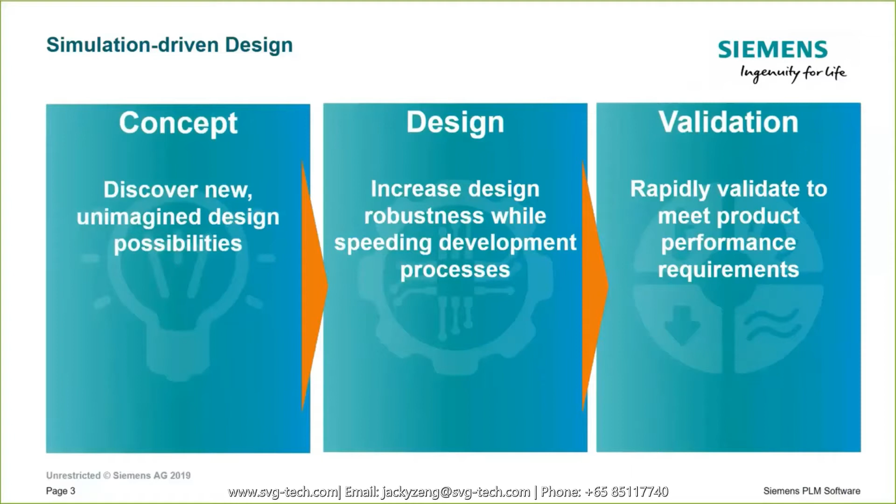At Siemens, we've removed the wall that has traditionally separated design and simulation teams. We've integrated our design and simulation technology through the combination of NX and SimCenter simulation technology. Both NX CAD and SimCenter 3D and Simcenter FloEFD products are based on the NX platform, which means designers and simulation experts can easily share data and technology.

This means simulation can be exposed to the design team directly in the NX CAD environment for both conceptual design and detailed design work. And simulation experts can have confidence in the results created by the design team, since they're using the same fundamental technology, and they can even have control over the types of simulations that can be run by the design team.

Siemens can help you implement simulation-driven design in two ways. The first, which was a focus of one of our previous webinars, is the ability to automate advanced yet routine simulation processes so they can be used by designers and design engineers. It's possible for simulation experts to capture and automate those complex analysis processes so that they become repeatable processes using best practices that have already been defined by your CAE team.

These routines can be packaged and deployed directly in the CAD environment, so your design team can perform these simulations on their own, which then frees up the CAE team to work on more complex tasks.

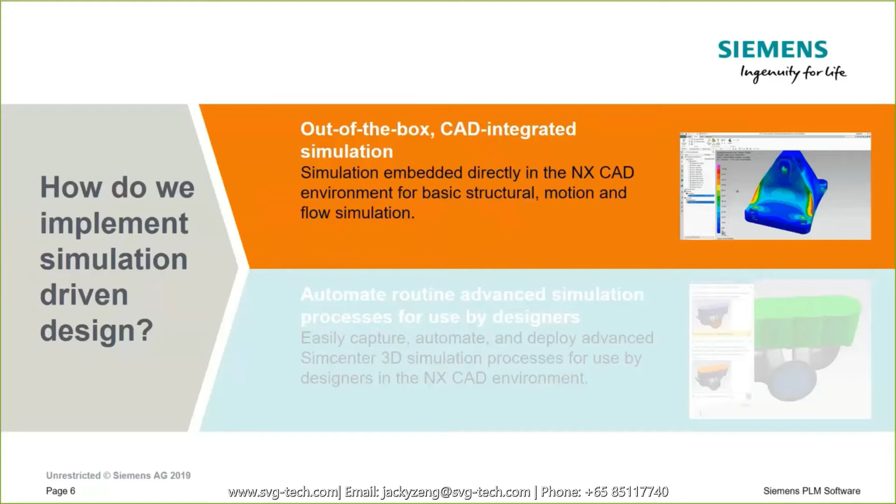Having a design-centric workflow is one of the key differentiators for ambitious, best-in-class companies today. A unified, consolidated tool such as NX streamlines the product design cycle.

So General Motors, for example, is making a push to expose simulation to designers, where they're using NX CAD embedded tools to determine if a particular design is reasonable, if subsequent iterations are improving its performance, or if a change actually degraded performance and should be abandoned.

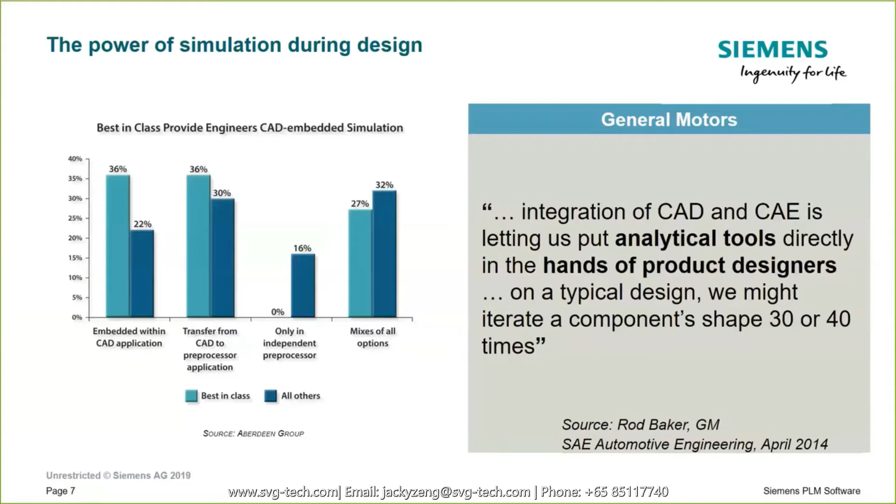So what do we mean by out-of-the-box CAD integration? We offer a set of simulation tools aimed specifically at designers and design engineers, and these tools can be added directly into your existing NX installations so that they appear seamlessly within your design environment. No additional configuration is needed.

These simulation tools are based on the leading SimCenter solvers that have been used by simulation experts for decades. This helps designers in two ways: first, the simulation technology used within the CAD environment is trusted; and next, the simulation data can seamlessly scale to your simulation experts using SimCenter. This facilitates increased collaboration and communication between designers and simulation analysts working toward the same goal of creating the best design that meets performance requirements.

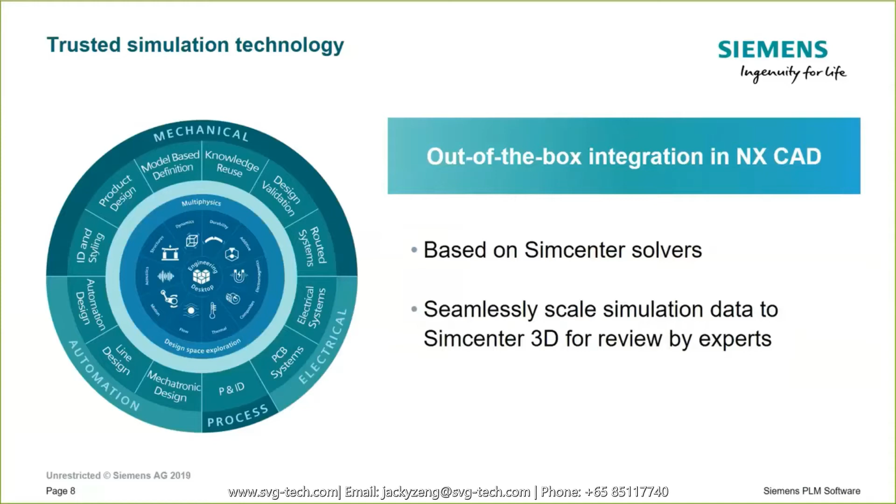Our CAD-embedded simulation tools are aimed at helping you achieve the right designs for structural, motion, flow, and thermal analyses. We also have a tool designers can use to create entirely new shapes optimized for structural performance and weight based on simulation results. This area is called topology optimization, but we're not going to address that today. We'll save that for a future webinar.

Before we get into a live demonstration, I want to give you an idea of how a design engineer could use CAD embedded simulation. Let's consider this example where a design engineer is developing a plastic extrusion die. The plastic will be pushed through this die at high force, and the plastic needs to come out the other side at a specified thickness.

But because of the large force, there is concern that the plastic could, at the exit, cause the exit opening of the die to deform, which would mean the plastic exiting the die would be thicker than what the requirements call for. So the design engineer can use simulation to verify whether the design will meet the requirements and also assess alternative designs.

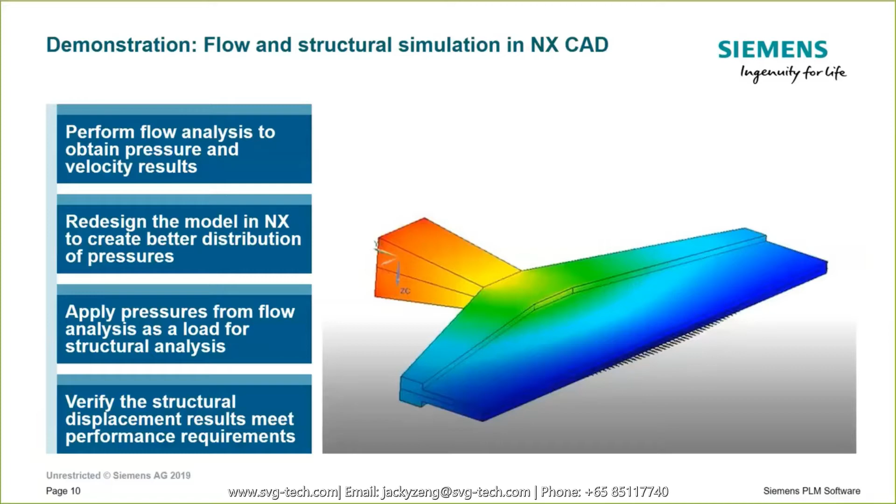Okay, so as Pat mentioned, my name is Tim Miller. I will be showing you an analysis of this plastic film extrusion die. This is the model that we'll be looking at, which you see on the screen here.

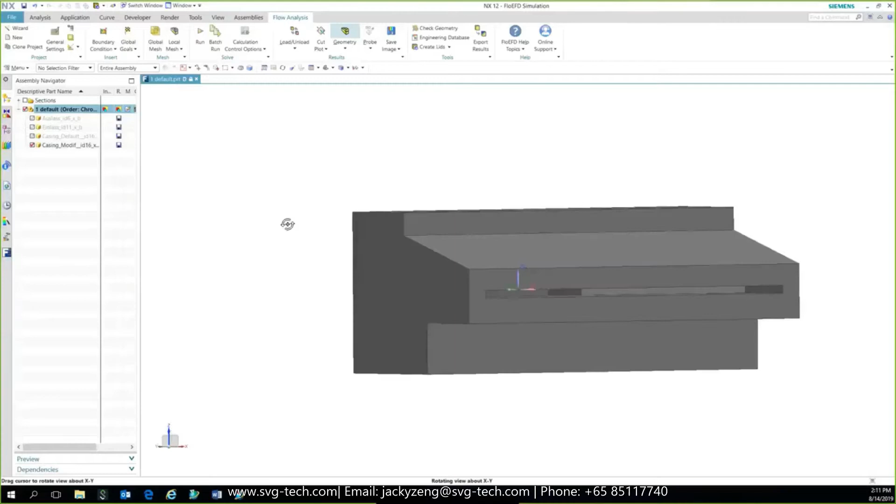The plastic comes in this square hole in the back, and let me put up a clipping plane here to show you what it looks like inside. So it comes down this angled plenum area, and there are actually two different versions of this. The original version that we'll be working with flattens out at that point and continues to spread out left and right until it comes out the front.

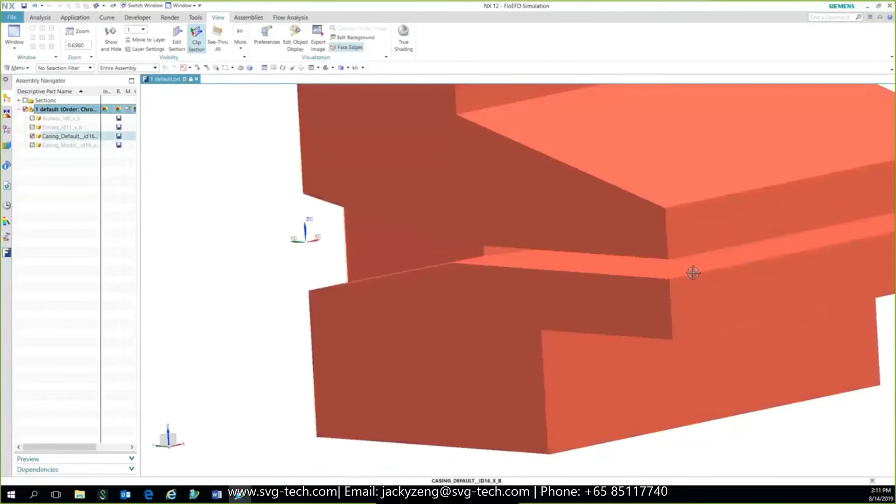The design concerns we have on this die are that we want to minimize the amount of deflection up in the front, and we want to equalize the pressures and velocities of the plastic as much as possible, so that when the plastic comes out of this die, it's a uniform thickness and comes out at the same rate across from the left to the right as we're looking at it here.

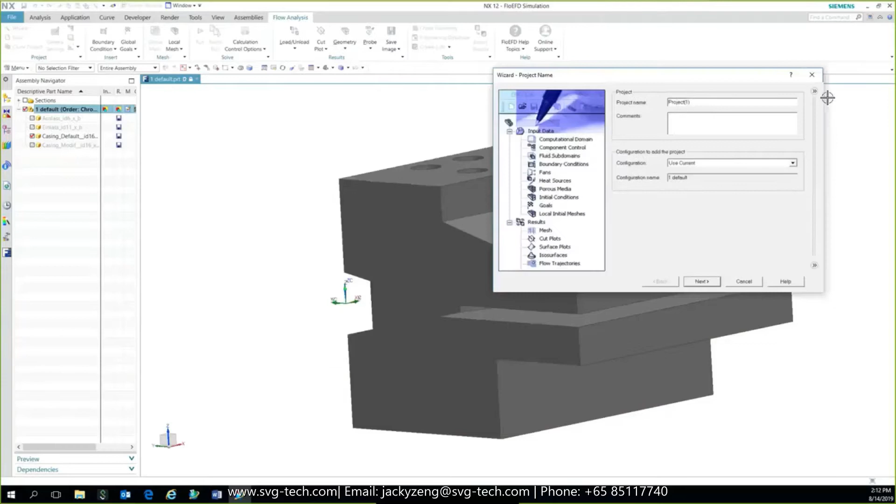So the first thing we're going to do is a flow analysis using the FloEFD simulation capabilities inside of NX. As you can see, there's a tab here for FloEFD called Flow Analysis. The first step is we'll start the wizard that'll walk us through the process of setting up the analysis. Let me move the part over here. The first thing it's going to ask us for is a project name. I will call this webinar.

And we're going to use the default part. I'll come back and show you a little bit later a modified part that we'll look at. When I hit next, it's now going to ask me what units I want to work in.

You can see some SI units are available, millimeters, foot-pounds, and so forth. I'm going to pick the USA units, which are feet per second, PSI, pounds, foot, and degrees F.

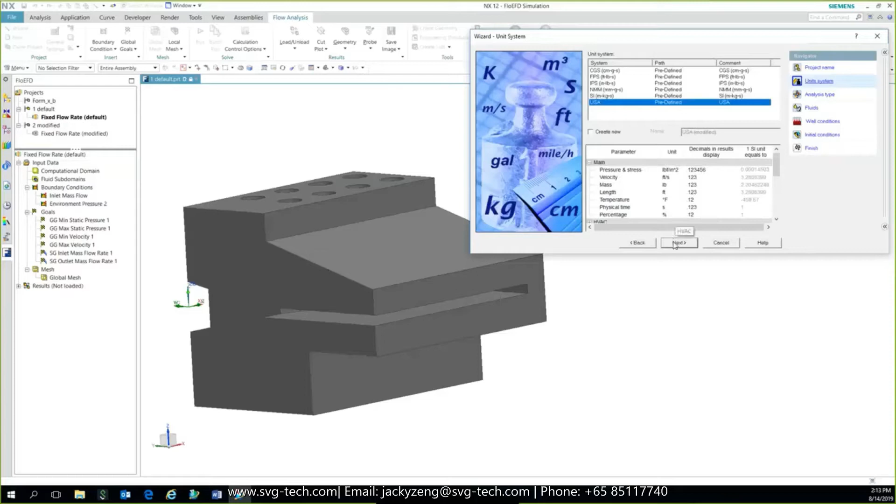Then it's asking me what type of analysis we're going to do. Are we going to do an external flow around the part, which is not the case here, or internal flow, which is selected by default, and that's basically flow inside the part, which is what we want. The flow is inside our die here.

So we'll select that, and then we also need to tell the software what other types of things we want to include in the analysis. We are going to toggle on heat conduction in solids, which will, when I do that, give me a check mark and add an item in my navigator, because if we're going to model heat conduction in the solids, we're going to need to define the properties of the solids, the material properties, and so forth.

Another option here is radiation, time dependency or transient. We won't be using those in this model, but we will turn on gravity. When I do that, it'll show me an arrow indicating the direction currently for gravity, and I can go in and change that. Turns out the negative Z shown there is the correct direction for this model, so I'll just leave it as the default.

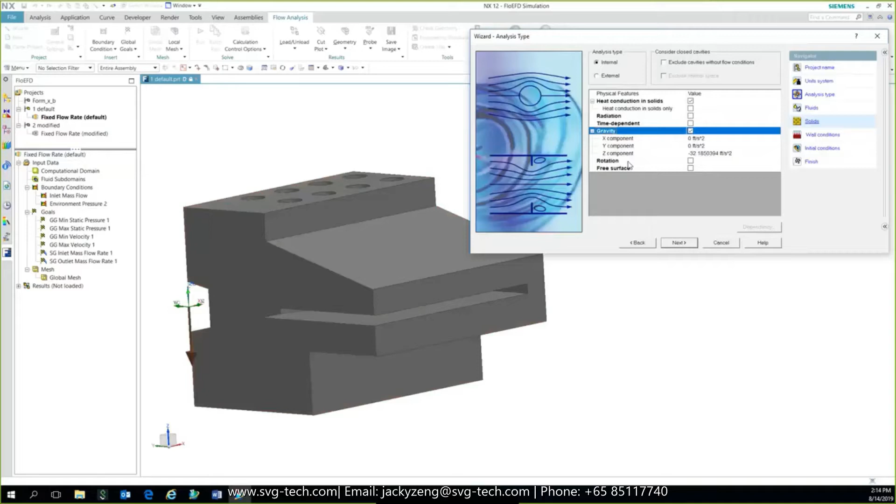And then there's also rotational capability and a free surface capability that we won't be using in this particular model.

The next step is to define the properties for the fluid. You can see we have a number of different types of fluids available in our library listed here. This particular model has a plastic in it, a non-Newtonian liquid. So I will open up or expand the non-Newtonian liquid fluids and select this Dow 501 material as my default fluid material.

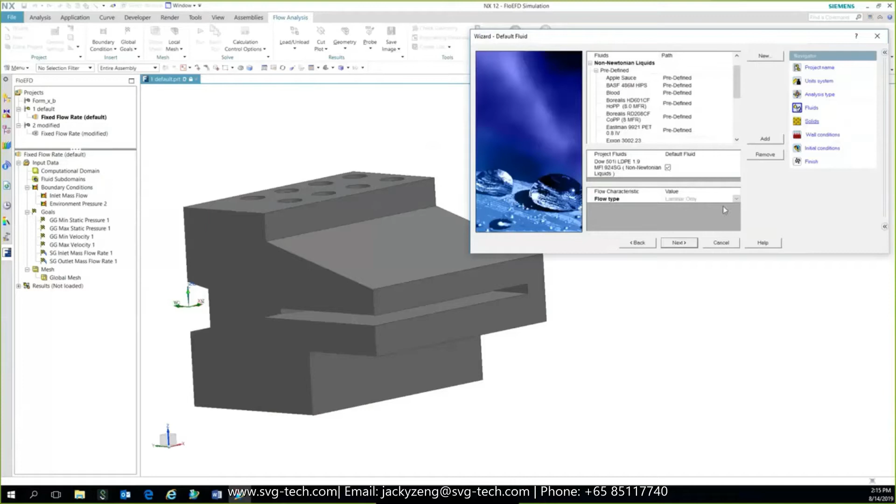Now for the solids, since we're going to be doing conduction in the solids, again, there's a number of standard materials available here, and I could go through different ones. The one I'm going to pick, though, is under the alloy, and it is a stainless steel material.

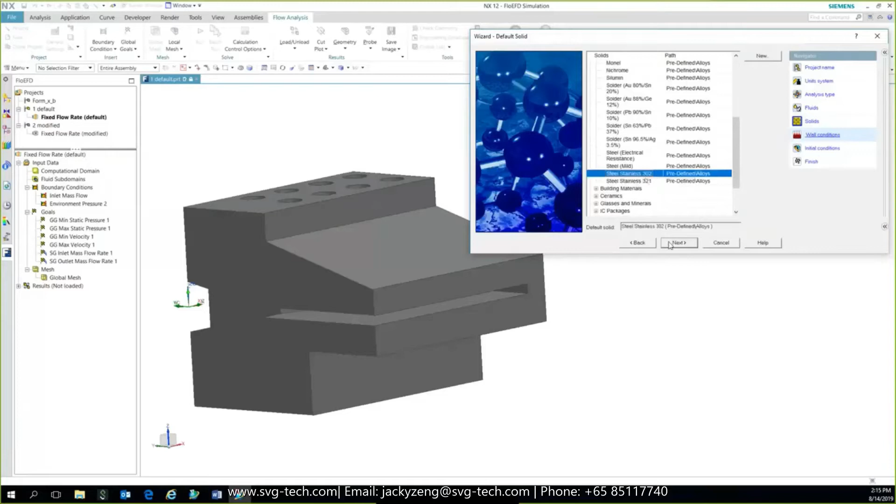Initial conditions, or wall conditions, actually, is next. Wall conditions are specific conditions that I'd want on walls throughout the model. I can also apply these individually by selecting surfaces within the model if they vary. But I could, for example, define adiabatic walls, heat generation rates, wall temperatures, slip conditions, and roughness, and so forth. So I'm not going to change the default there.

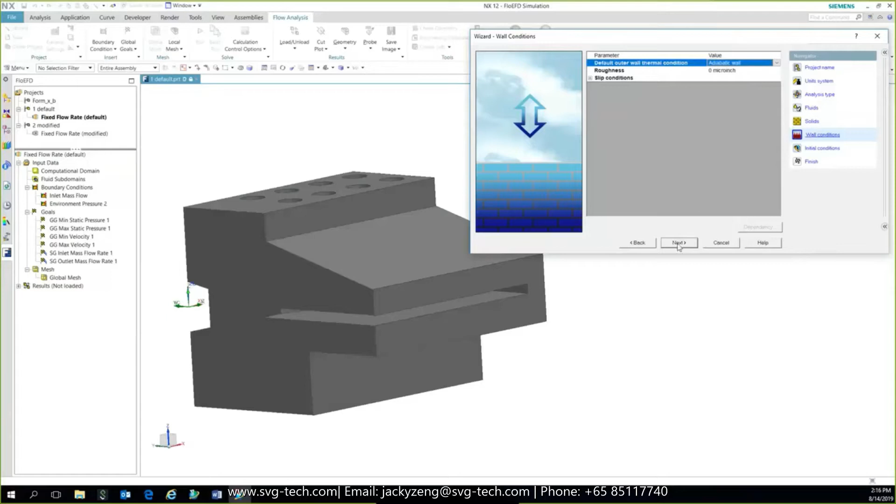The initial conditions is the next item, and you can see there's different thermodynamic parameters I could define: pressure, temperature, and temperature is actually something I want to change. I'm going to start with the melt temperature for the plastic, which happens to be 450 degrees Fahrenheit. And everything else I'll leave as the default.

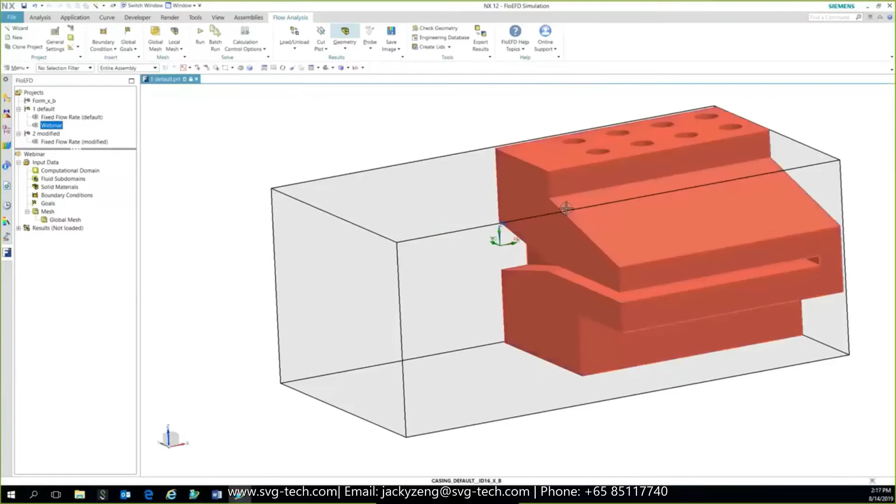So when I hit finish there, it creates this input data for my FloEFD CFD analysis. It also shows me on the screen this envelope that represents the computation fluid domain within the model, which is basically a tight envelope around the model. I'm only showing half the model here, so you can see it fits tightly around that.

I'll go ahead and turn the display of that off. We don't really need to do anything with it at this point.

Now, a couple things that I want to show you as well. Inside of this part, I have created a couple of additional parts. I mentioned that there is an alternate design of the die, which I'll get to in a little bit. But another couple things that we have here are lids or parts that I've created that close off essentially the inlet and the outlet where the plastic goes in and out of the model.

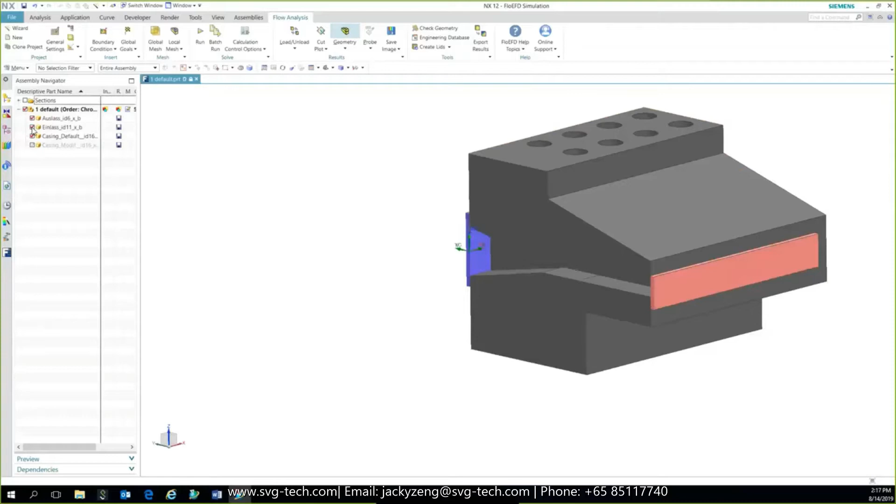So I don't have to go in and define a separate part for my fluid. I just have to close out where it's open with any type of surface part or solid part that covers that face. You can see they're a little bit bigger than the actual face, which is fine. I will also use those parts as boundary condition selections here in just a second.

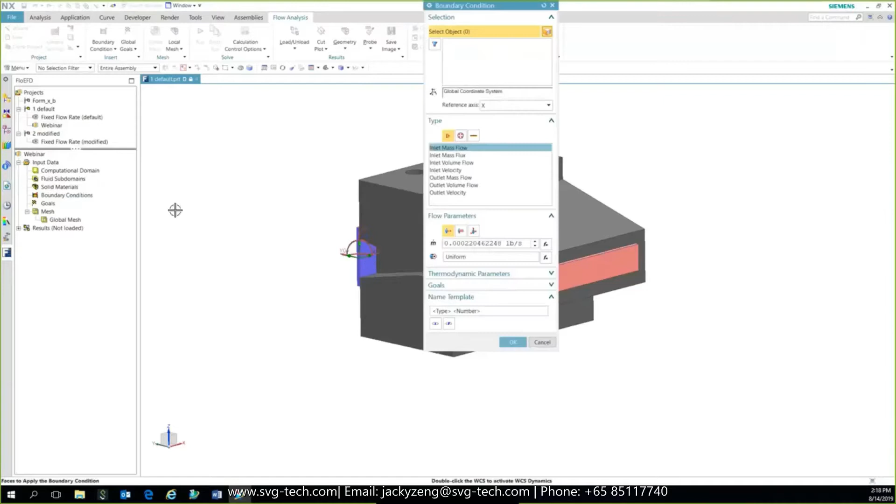So let's go ahead and start setting those up. Let's set up a boundary condition, first of all, at the inlet, which is on this blue surface here. And I can go back to my screen and pick that part right off of the navigator if I want.

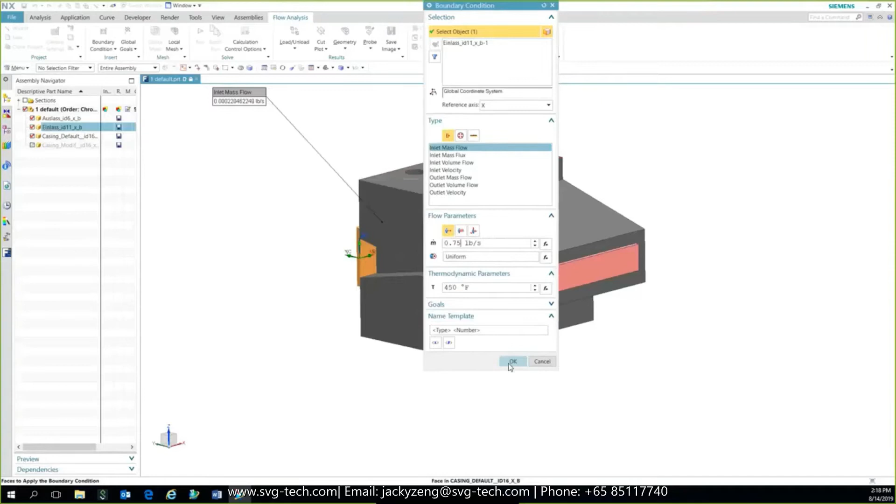This is going to be an inlet mass flow. I'm going to use a little bit higher flow rate than the default here, 0.75 pounds per second. And if we look at the thermodynamic parameters, it's also picked up that initial temperature value as the inlet temperature value, and I'm not going to change that at 450 degrees F. So when I apply that, you can see the red arrows pointing inwards, indicating that I've got an inlet condition.

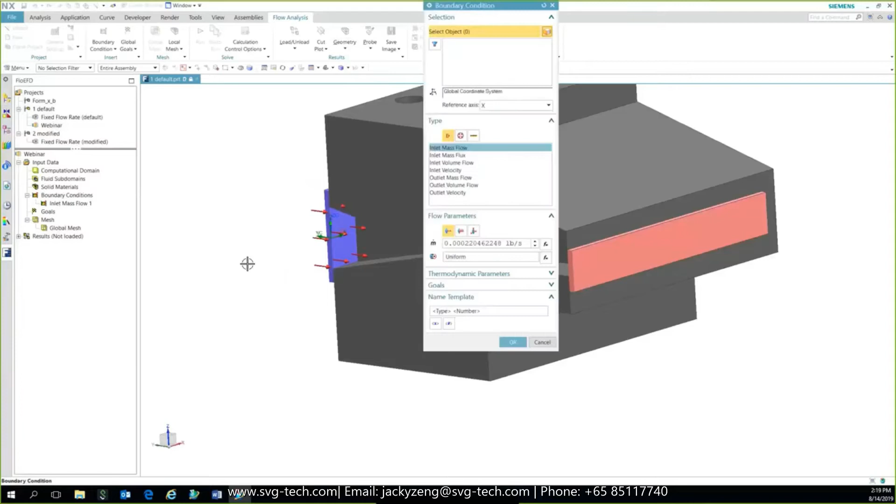On that surface, making the flow go into the model at that point. We create another boundary condition for the outlet or the opening on the model, and this time I will just select the surface here on that lid that I have created. This is going to be rather than a flow opening, this is going to be a pressure opening. So I'm going to define environmental pressure at that location, and I'm going to take the default values, 450 degrees Fahrenheit and standard pressure, and we'll say okay to that.

So that defines the two boundary conditions, just an inlet flow and an opening pressure there. But there are some additional things that we want to define on this model, and those are goals. The goals are used both to tell it what kind of results we're looking for, so when FloEFD solves the model, it gives me those results. But it's also used to determine when the solution is complete, when the solution is converged, making sure that these goals that I define are fully converged and give me results that I want.

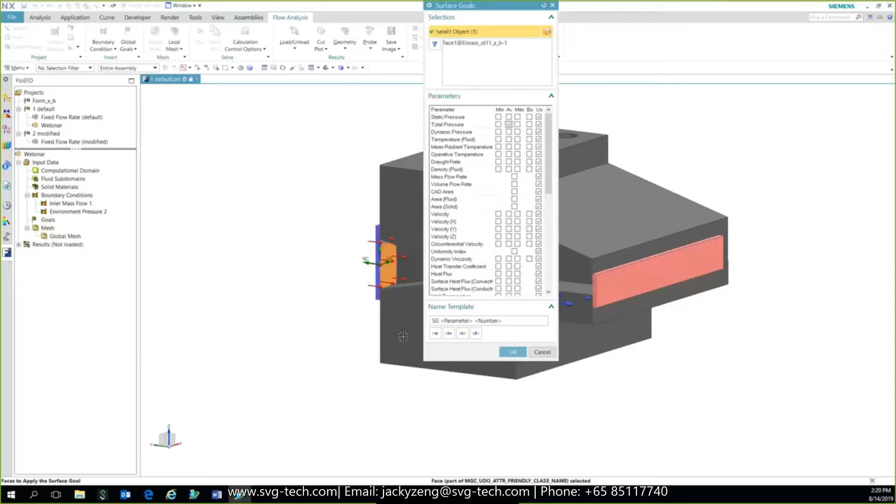So the first result that I want to see is pressures, and I'm going to select total pressure at the inlet as one of my goals on the model. And then I have another surface goal. I'll put this one on the outlet, it's going to be velocity. So we're going to get velocity results, and we want the velocities resolved through the model at the outlet. So that gives me 3 goals there.

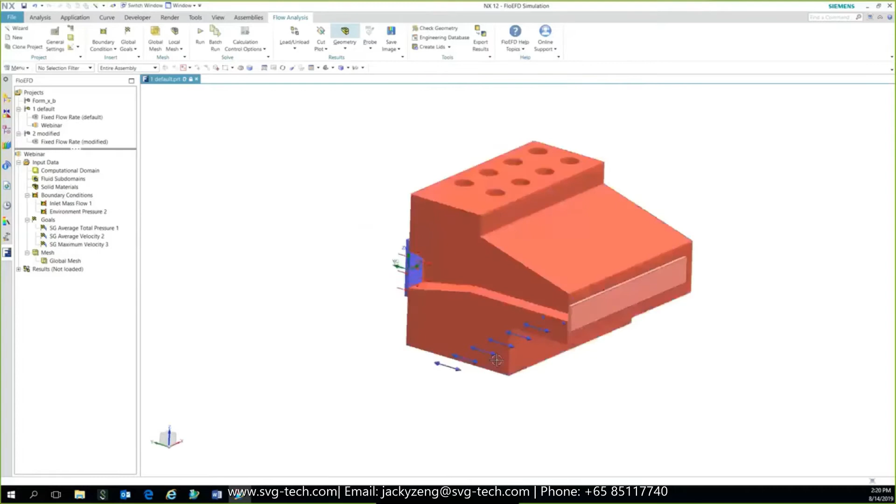And then the last goal that I'm going to set up is kind of a combination goal. I want to know what the pressure drop is through the die. So I'm going to set up what we call an equation goal. We'll call this pressure drop, and it's going to be a function of the inlet total pressure minus the environmental pressure.

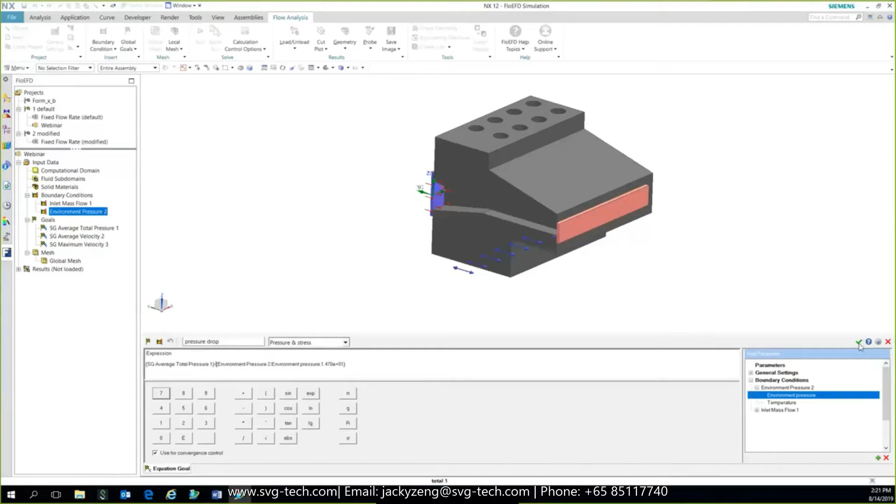Let me double click on that. So we've got, if you look at my equation here, we've got inlet total pressure, and that doesn't look like a minus, so let me repick that. It looks like I picked the wrong thing there. Yeah, it's just the way it looks, I think it is a minus. So inlet total pressure minus the environment pressure. I'll go ahead and click on OK for that, and that'll define the pressure drop throughout the model.

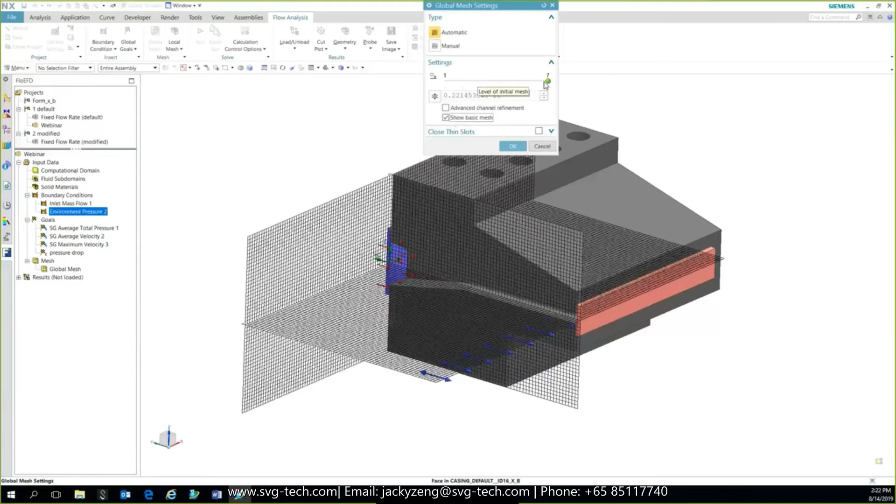Lastly, let's take a look at the mesh. By default, it will give me an automatic mesh that gets generated during the solution, and I can edit that. I can take a preview by turning on the showing of the basic mesh. I can increase the level of the initial mesh or decrease it if I want. I think I'll leave it somewhere here in the middle. The software will automatically go in and refine the mesh to capture fillets and small openings and things like that based on the mesh size I use, as well as I can turn on this minimum gap size, which I'm going to do.

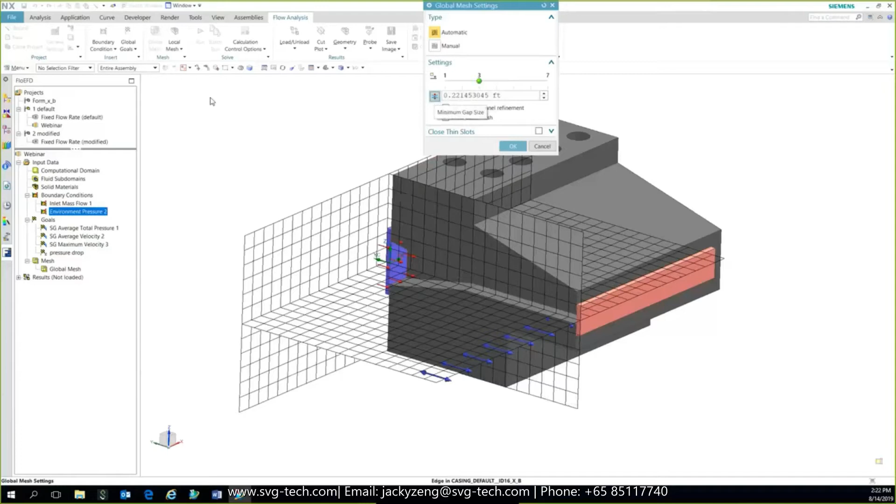For the minimum gap size, you may want to take a look at a small gap in the model, and whatever I put for that, it will make sure it resolves anything that is larger than that gap size that I specify. It will resolve that. So let me go in and do a measure here, and it tells me that's 10 millimeters across that small gap. So I'm going to set, rather than feet, I measured that in millimeters, so I'm going to type in 10 millimeters, and it'll convert that to feet for me, 0.0328 feet. And anything that size will be resolved with the mesh and included as part of the analysis.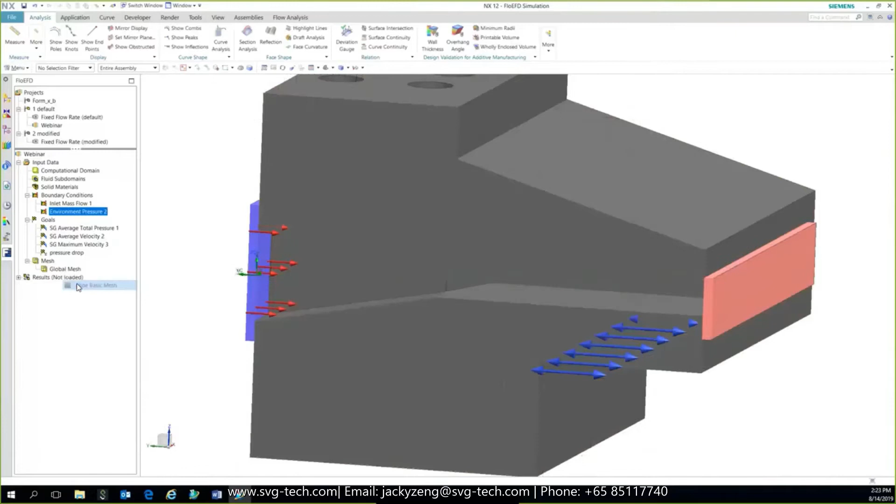So go ahead and hit OK to that, and we can hide the display of the mesh. And that's it, the model's ready to set up and solve. I'll go ahead up here at the top and tell it to run that. This is going to be a new solution, I'm going to solve it on this computer. I could also run it out on a server, and I can tell it how many cores that I want to use. I'm going to use all the cores on my laptop at this point.

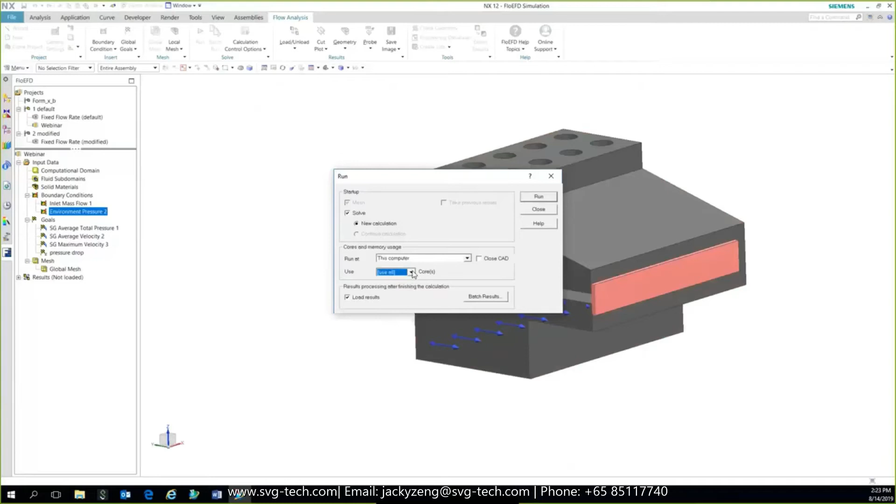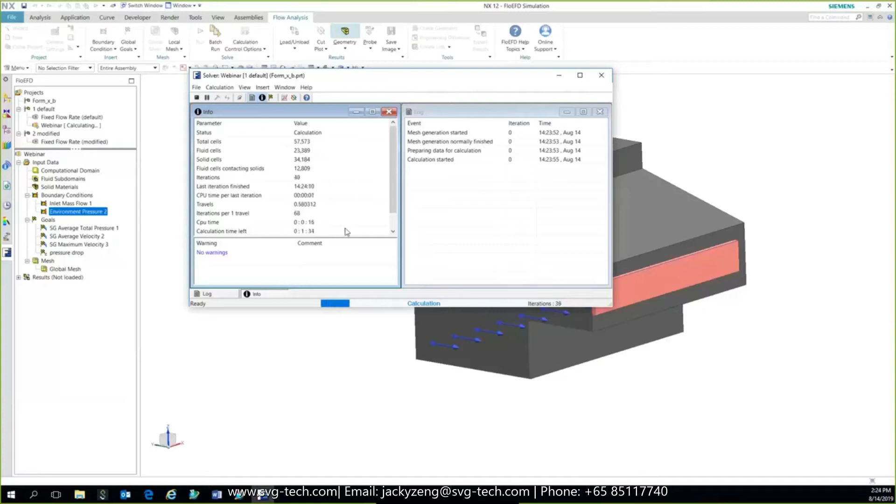I'm not going to wait for it to finish, though it only takes a couple of minutes. What I will do is show you the monitor that comes up, so you can get an idea what it looks like while it's solving. It tells me it's got about 57,500 elements total, about 23,000 of those are fluid and about 34,000 are solid. It gives an estimate of how long it's taking and how much longer, a couple more minutes, and it'll be ready. But while that's solving, I went ahead and solved the model ahead of time, and we can start looking at the results on that model.

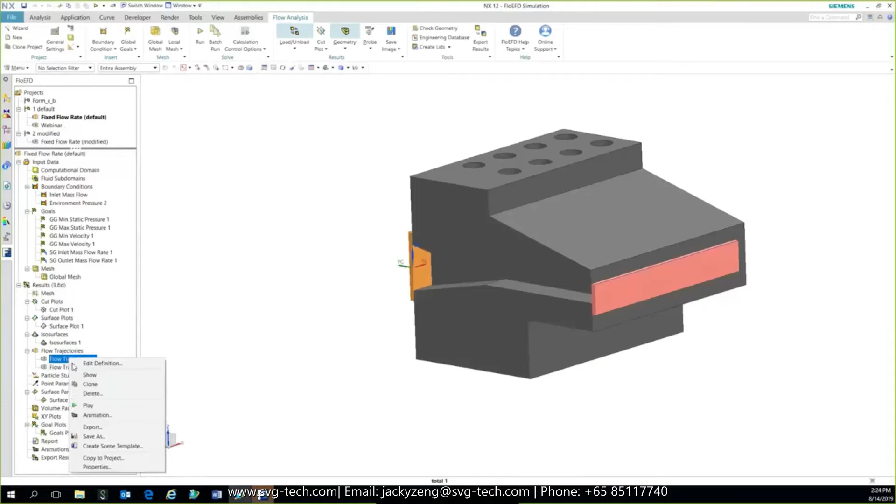The first thing I'm going to look at is some flow trajectories, and I need to load the results in order to see those. So let me do an animation of the flow trajectories and see, based on the velocity results, how it's tracing those trajectories through the model. Maybe a little easier to see if I turn off the geometry and rotate that. So that's one thing we can look at.

Another thing we may want to look at is a cut plot. Let's show that. What that's showing me here is the velocity result, on a cut plane showing the arrows as well as colors indicating the magnitude of the velocity in feet per second. What we see, and maybe a little concerning with this design, is that the higher velocities are more concentrated in the middle here. We'd like to see that spread out a little bit more, and we're probably not going to get that to be perfectly even without a major redesign, but we'd certainly like to try to spread those higher velocities out a little more.

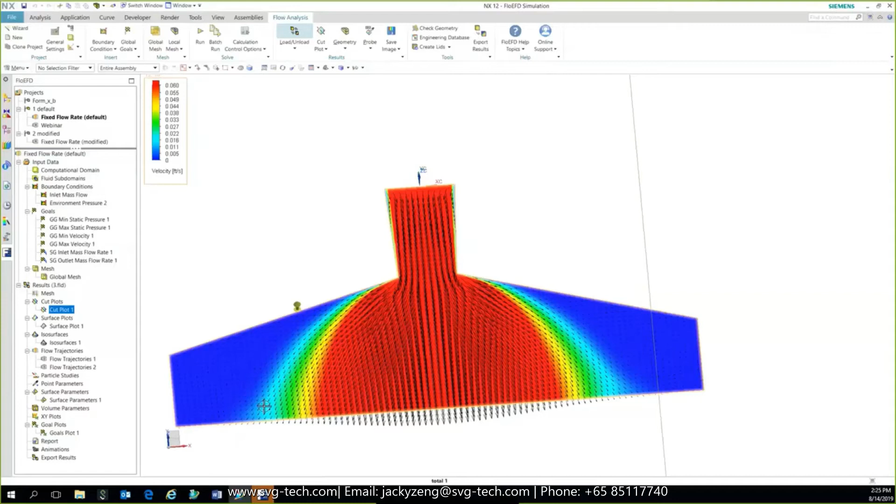If I add on a surface plot of my pressures on top of that, we'll notice we've got pretty high pressures all throughout that angled area at the inlet. They don't really start reducing until it spreads out here, and they're not real even as well. I'd like to see more of an even line across here on my pressures so that I don't negatively impact the deflection of the die when I look at my structural analysis. Because if it deflects, that's going to give me some irregular or non-even thickness in my plastic as it comes out of the die.

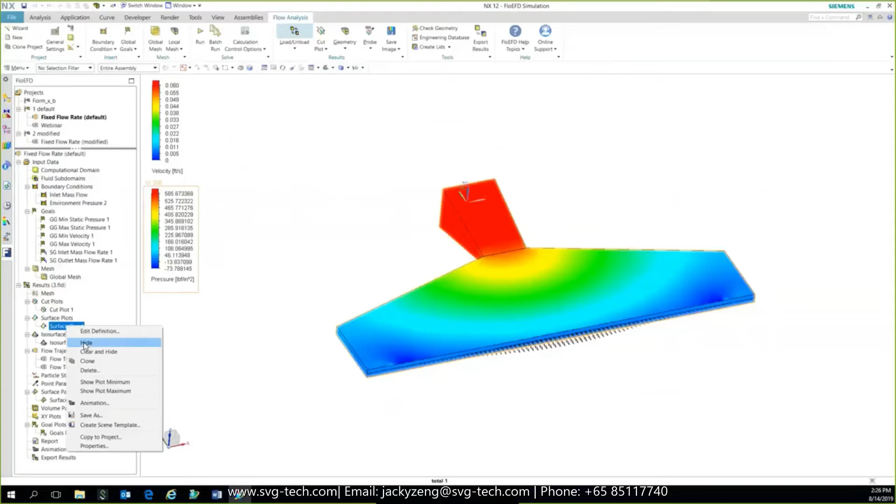So those are a couple of concerns that I have with this model. Let me go ahead and close out. Looks like that thing's solved, we'll go ahead and close that out. But rather than continue with this design, what I'm going to decide to do here is modify it. I showed you earlier a brief view of that redesign, a potential second design.

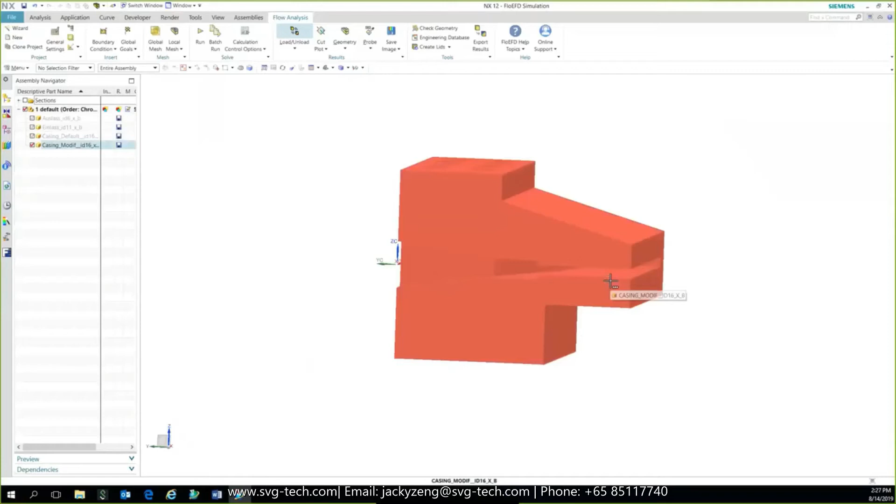Let me hide these results and show you what that second part looks like. So here was my original design - basically, it comes down at an angle and comes straight out. My modified design starts in the same location, comes at an angle, and then opens up a little bit more before it flattens out. The idea here is that hopefully with this opening the pressures will dissipate faster and spread out more, as well as the velocities being a little more even across the outlet.

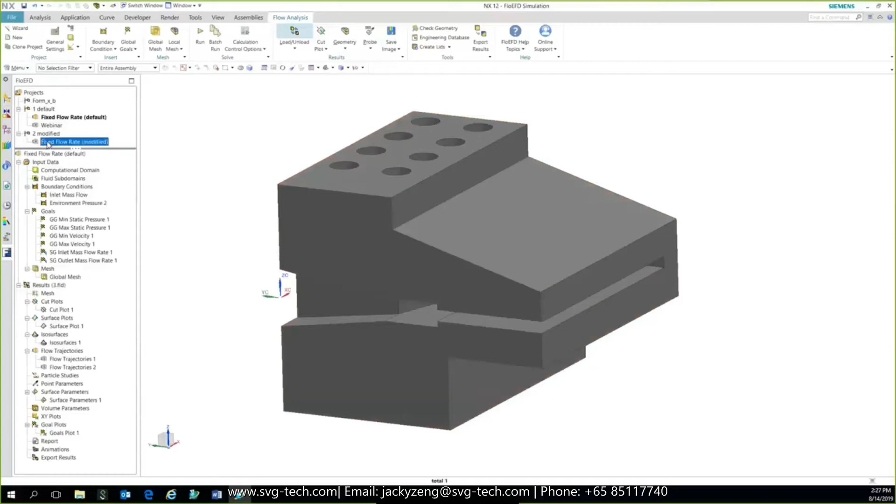Whenever you want to redo an analysis with a new part, since it's fully integrated here inside of NX, it's very simple to just switch the part out, apply those boundary conditions, and resolve it. I went ahead and did that ahead of time in the interest of time, and that's what this modified project is. So let me pull up the results of that.

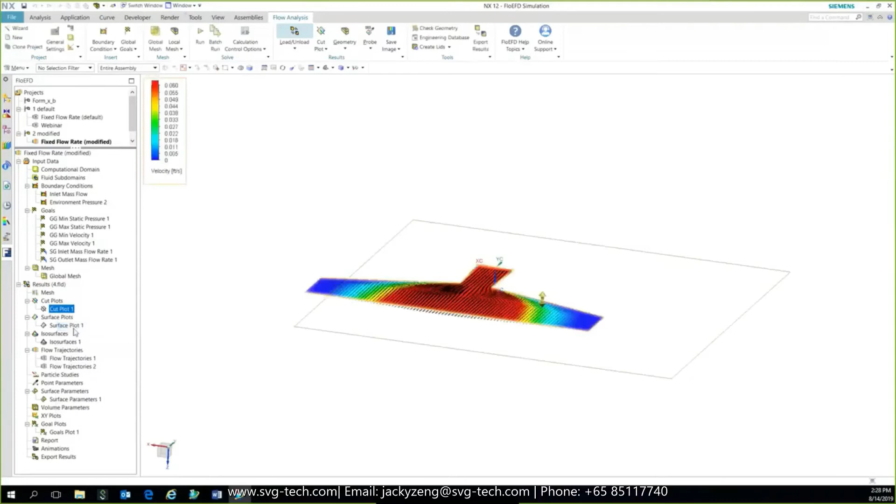As you can see, I've got some of the same results, the same boundary conditions if we were to look at those. Let's turn off the geometry and look at my cut plot, which was my velocities. A little hard to tell, but they are a little more spread out - maybe not quite as much as what I want, but that looks a little better. Looking at my pressures, they definitely look a little different. We've got the light blue pretty well all the way across here, and the red - the pressures are dropping faster at the inlet. These should be the same colors as what I had on the previous plot.

Now, something else I can do here is go in and do a compare. Let me see if I have these loaded here. Yeah, so we can compare one set of results with the other. Let me make this a little bigger so you can see it.

There we go. You can't see the scale, but they do look the same. If you zoom in, the maximum is the same. This is the original on the right, and the redesign on the left. You get a better feel for how the fluid shape opens up a little more and then steps down to the same shape at the outlet. So it looks like this redesign will give us a little more even pressure distribution, which should make the deflections look a little better.

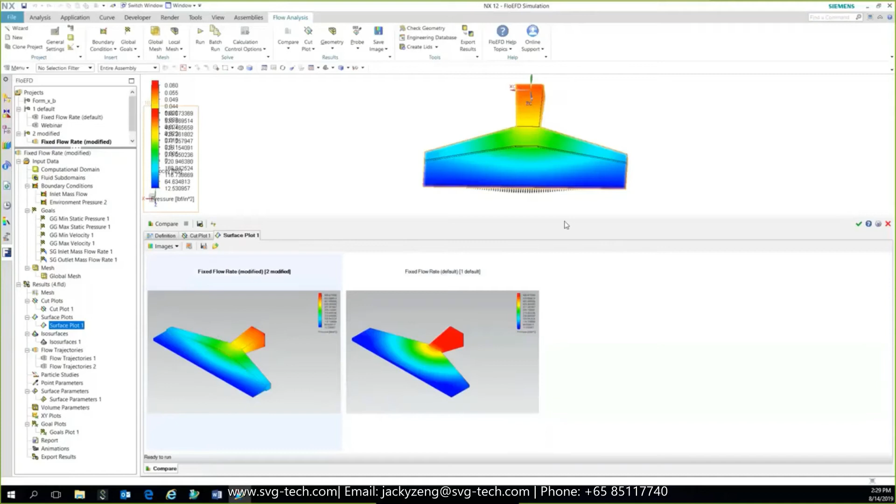That's the next thing I want to look at. Let me get out of this compare view. I want to do a structural analysis on this part.

The way I'm going to do that is export the results from this particular model, the one I have selected, to the product I want, in this case our Nastran structural solver. I can either interpolate onto an existing Nastran mesh, which I haven't set up yet, or export it on the FloEFD mesh node locations. I'll export the pressures, with units in meters and pascals.

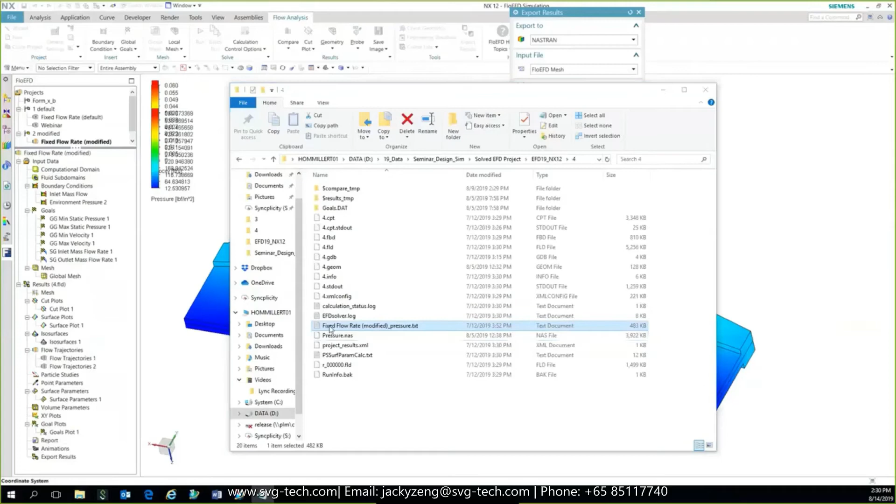On the structural side, when I read that data in, I'll have it interpolated onto the structural mesh I'll define in a bit. The file that gets created, which I already did, is just a format of XYZ location and pressure, in meters and pascals. There are somewhere around 13,000 lines of data from the model I'll be looking at. So export that out, and now let's look at a structural analysis.

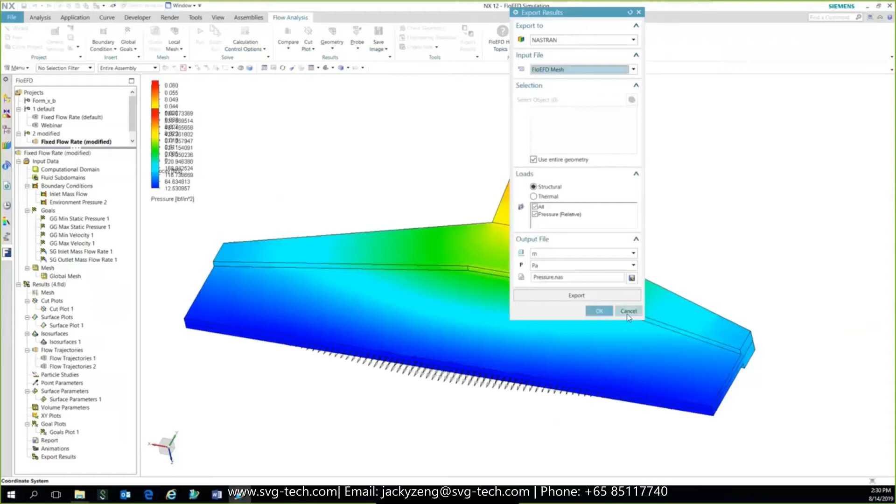For the analysis, we'll set up a finite element model for Nastran. The type of analysis will be structural. You can see there are other options available as well.

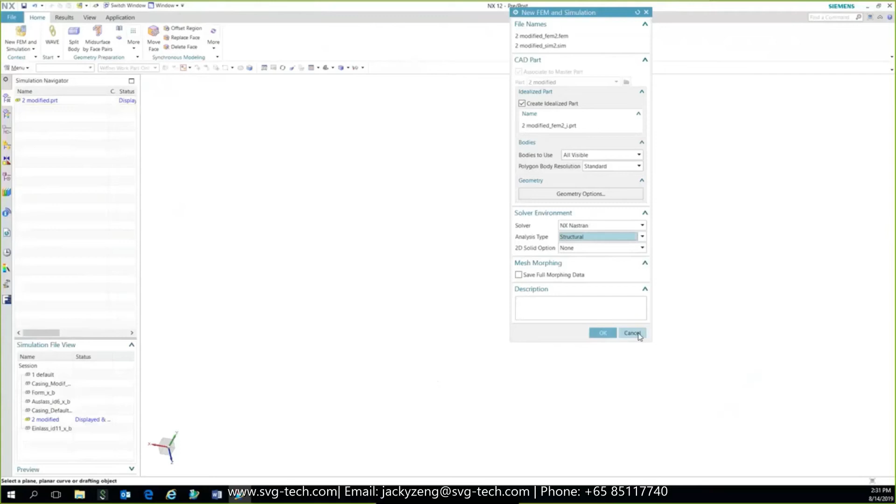The bodies I want to use need to be turned on if I'm going to use visible bodies - I don't have any displayed right now. So let me turn on the modified model. You can see this is the one that has the step in it. You rotate it the way I've been viewing it, which is this view here.

Let me get back into creating my FEM. We're going to only use the visible bodies - there are 3 other bodies available, but we're only analyzing this particular one. I don't need my lids because those were just used to enclose the CFD volume. For the solution name, we'll call this webinar, and I think that's the only change I need to make on my solution.

The first thing I want to do is define the structural mesh. There's a number of options, types of meshes you can create in SimCenter. I'll be using a 3D tetrahedral mesh, which makes the most sense for this geometry. You can also create 2D meshes, a swept mesh giving hexahedral or brick elements, beam elements, and other options. You can even manually create nodes and elements or extrude and revolve elements - a lot of meshing capability I'm not going to get into today.

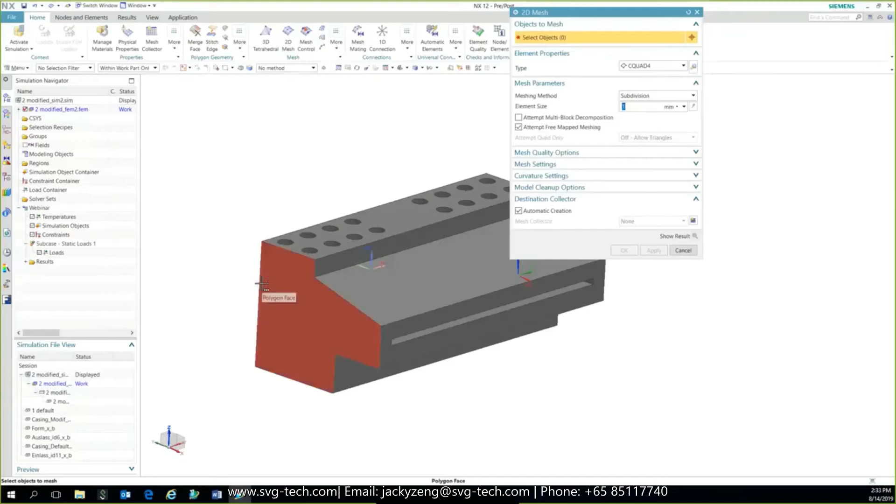Depending on the solver you select, we have the language built in for that solver. So this 2D mesh form is showing only elements available for Nastran. Had I selected another solver, it would show elements specific to that solver. So it shows not only the elements but the boundary conditions that will get created for that particular solver.

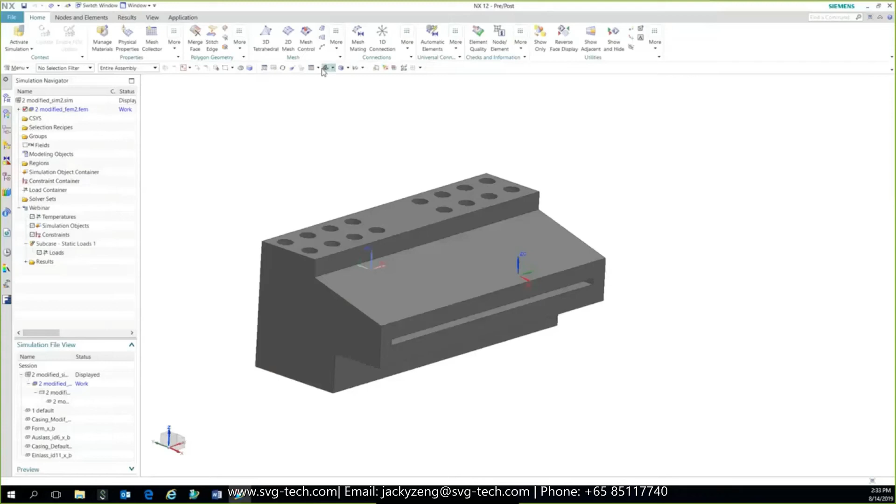So let's go ahead and create the 3D mesh. I'm going to use the TET10 element, the parabolic tetrahedron, with a mesh size of 15 millimeters. I'll leave the quality check, curvature variations, and other settings at their defaults.

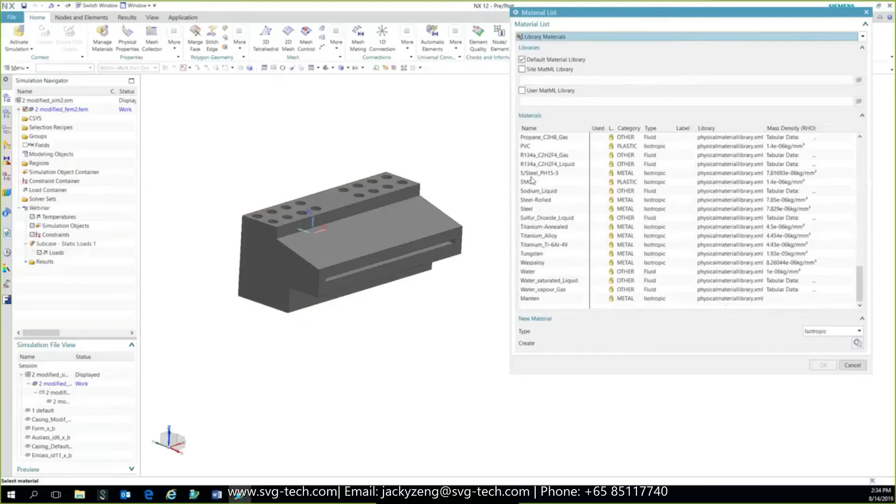One thing I do need to change is the collector, which tells the software what material to use. So I'll set up a new physical property table and pick a stainless steel material out of our library. In the Nastran library, there is a stainless steel right there - we'll use that, and we can call it steel.

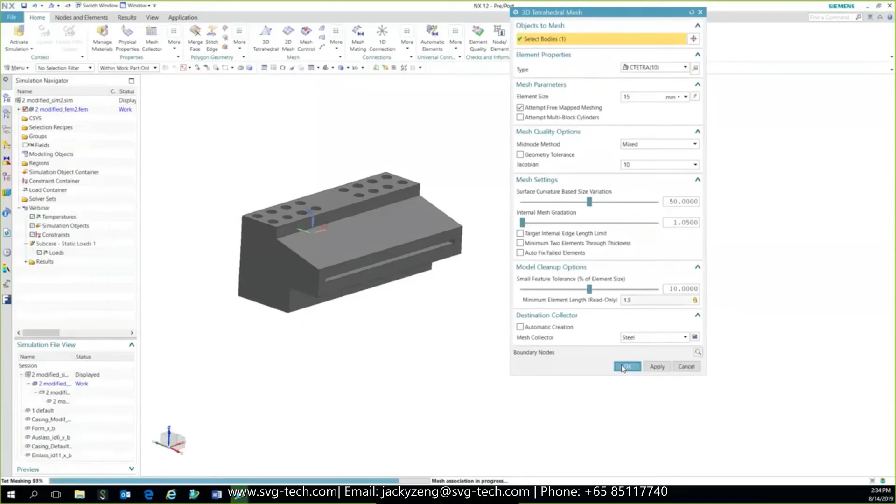And we'll go ahead and generate the mesh. For Nastran, you generate the mesh before the solution on the part, so we'll actually get to see this mesh. And it looks pretty good. It automatically refines the mesh around curvature. You can see a little finer mesh around these holes here.

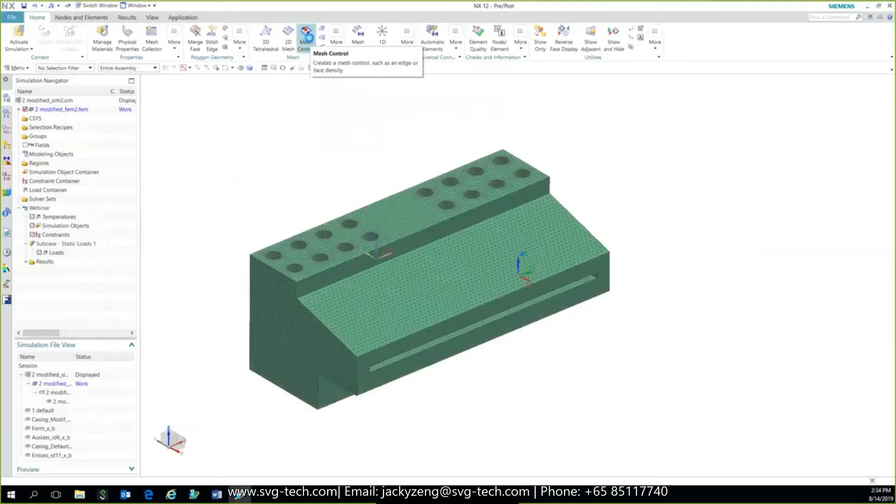The only thing I defined was that I'm going to try to create elements that on edge measure 15 millimeters. If I wanted more control, there are a number of mesh controls I can put in here. I can specify a specific size on an edge, do biasing, specify size on a face, even set up boundary layers, so layers of elements next to a wall. We can also define a bounding volume where you pick a volume inside the part and refine or coarsen the mesh in that area. But for this model, I just used the global size of 15, and that's all I define.

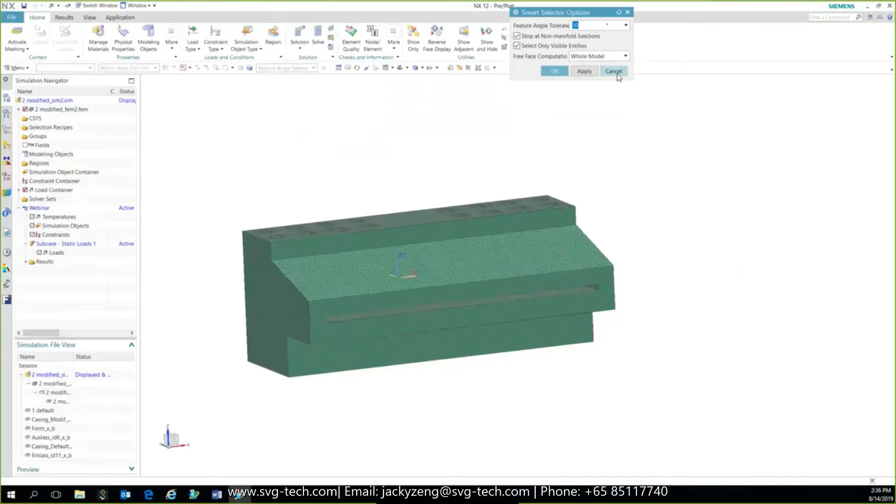And then I've got 2 boundary conditions to set up. The one we've been talking about is the pressure load that came from the FloEFD model, so let's do that one first. It's going to be applied on element faces inside where the plastic is pushing, inside this die. The easy way to pick those element faces is setting my selection tool to feature angle elements. What that does is if I pick an element face, it grabs any other elements within a 30-degree tolerance of being tangent to that face. So if I go in and pick one of these, it essentially gets that entire surface.

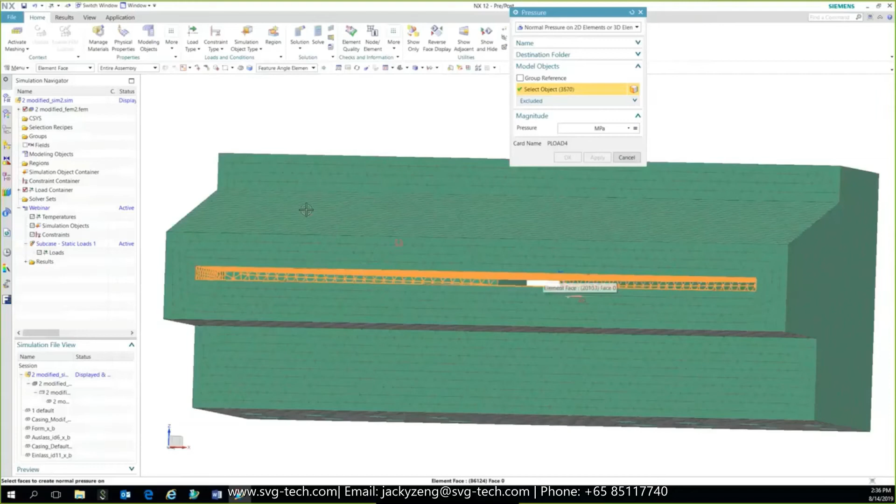Let me go ahead and select some more of these to get the rest of it. You can apply boundary conditions to geometry, which you'll see me do in a minute when I apply the constraint. The reason I'm not doing it in this case is I need these node and element locations to map those values from the FloEFD model onto this model. So we can get the rest of these faces. There's one there for that lip and that one, and that should have all of them covered.

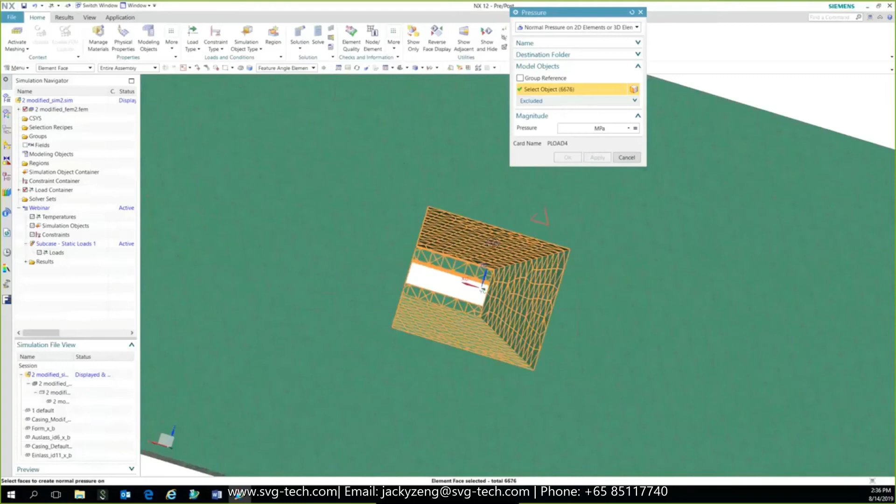Now for the pressure value, I'm not going to put a constant pressure in. We want the pressure to come from that result file from FloEFD. So I'm going to set up a table field, and it's going to be a function of the Cartesian coordinate X, Y, and Z and pressure, except that if you remember when I was setting that up, the units were meters for the X, Y, and Z coordinate, and the pressure was in pascals. So let me set those units up, and then I'm going to go and pick that.

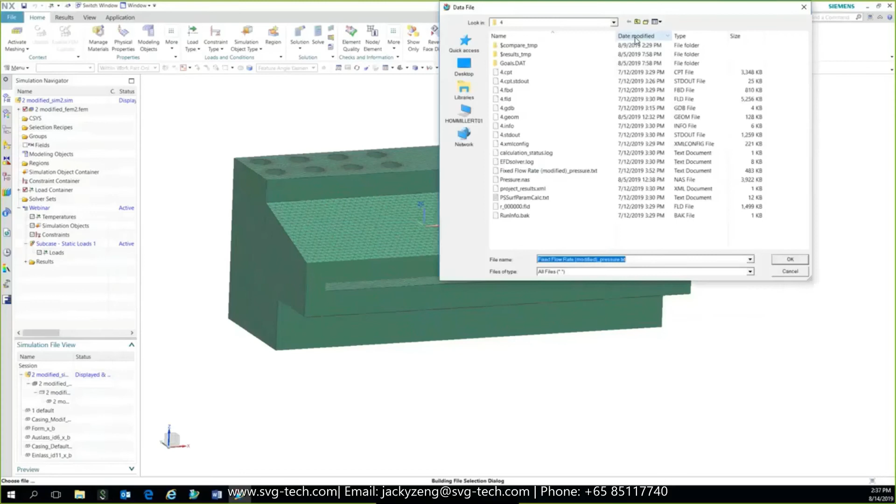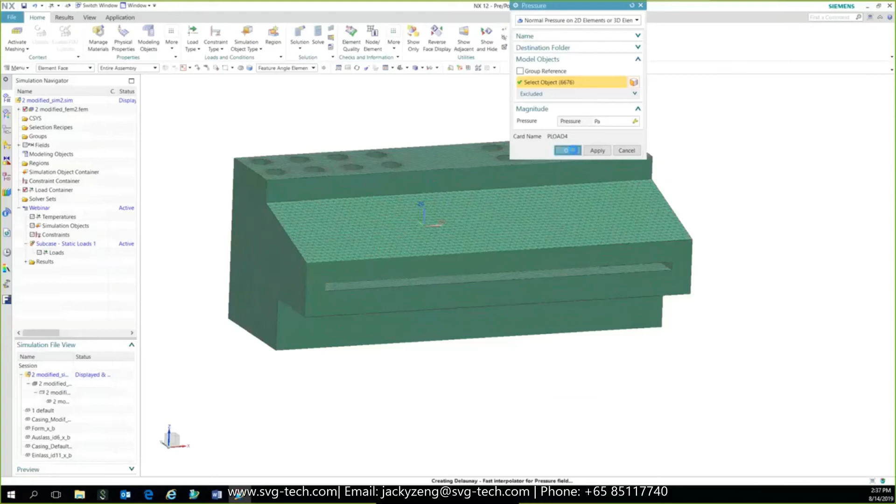The result file that I exported is right there, and it'll bring that in. As I mentioned before, I think there's like 13,000 lines in this, so it's brought in all those values. When I hit OK, it'll map those onto the node and element locations of my structural mesh. If I want to verify those, I can do a contour plot of that boundary condition to view and see that, yeah, this does look like what I had on my FloEFD results.

The other boundary condition that I want is the constraint. I'll turn off the elements for that and set up a fixed constraint, and it's going to be on the holes on the top and bottom here. I should be able to just do a window around those holes to select them. Total of 64 faces - there's 16 holes on the top and the bottom, so that's 32, plus the bottom face is 64, and that looks good.

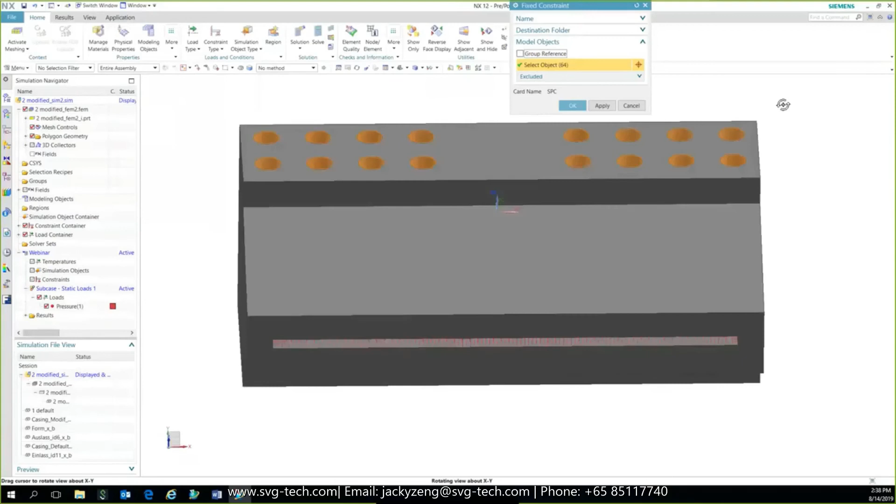So that's the fixed constraint. There it is. And the model should be ready to solve. Let's go ahead and solve this one.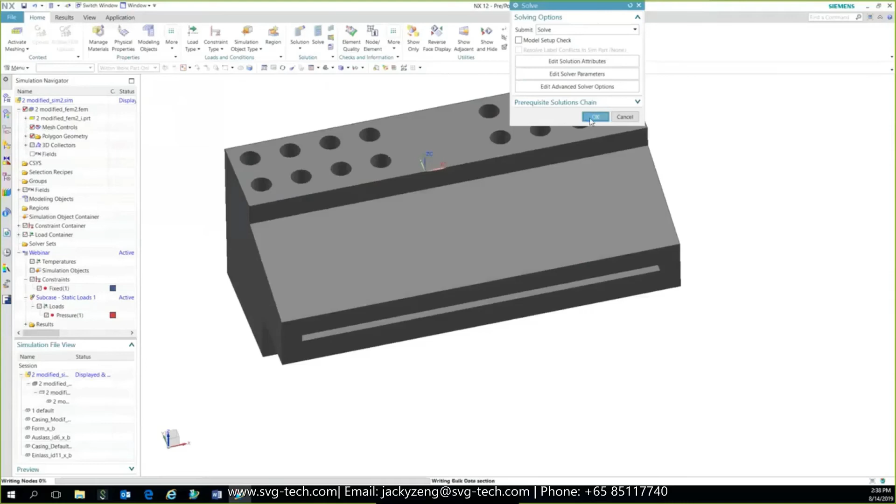It takes less than a minute, so I'll go ahead and let it run while we wait here and show you what happens during the structural analysis solution as well. First it goes through and writes the model out. Let me move this solution monitor over. Looks like it created about 250,000 tetrahedron elements, 261,000, and the nodes created were about 388,000 nodes there. We've got the pressure load on 66,000 faces, and about 23,000 nodes being fixed there.

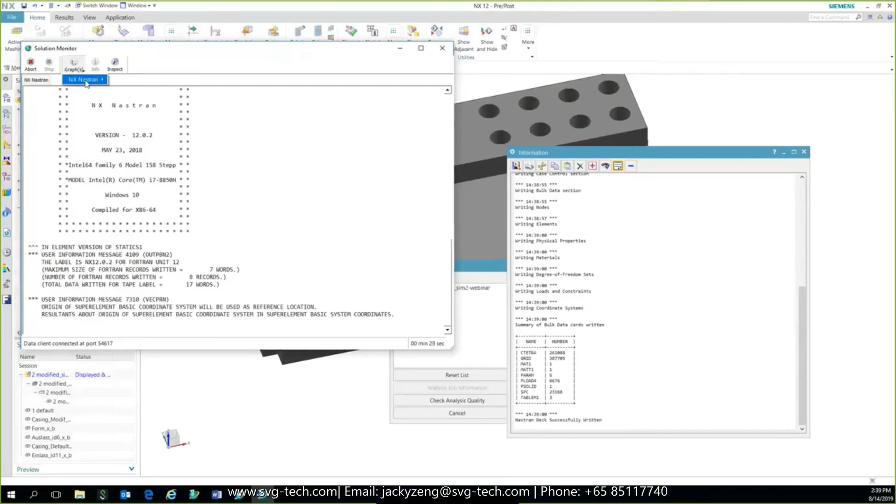So as it's solving, we can look at a graph of the convergence, and you can see it's converging pretty quickly here. Within just about 30 or 40 seconds, it's converged, and we have our structural results. So let's close these windows out. Normally with structural analysis, we might be more interested in stresses, but on this particular model, I know I'm not going to be anywhere close to yield stress on this material. So I'm more interested in looking at displacements. Let's take a look at those.

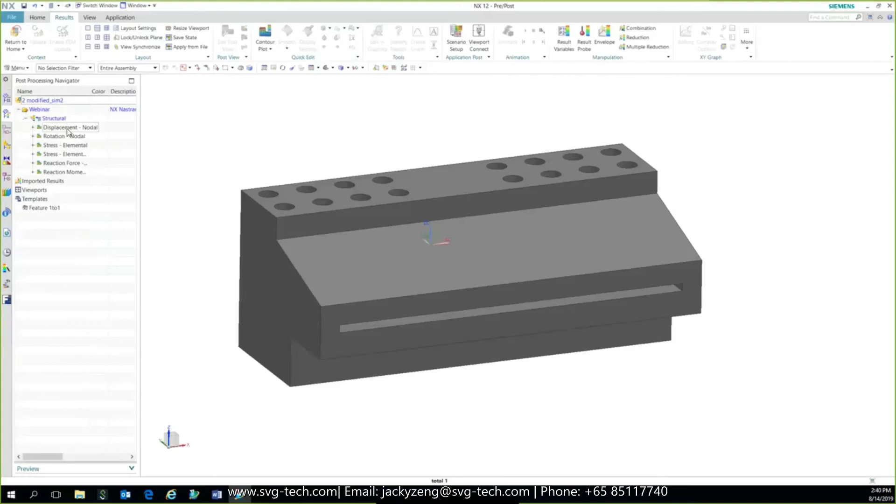So let me turn off the exaggeration that comes on by default and show the nodal displacement. These are the displacements, and they kind of match the pressures. If you think about it, it makes sense that there's a bit more displacement on the bottom than the top, because there's less material on the bottom stiffening it. There's a little more material on top, so it's slightly less. Overall, my goal was to keep this under 0.1 millimeter deflection, and we've done that, so it looks like this new redesign is going to work.

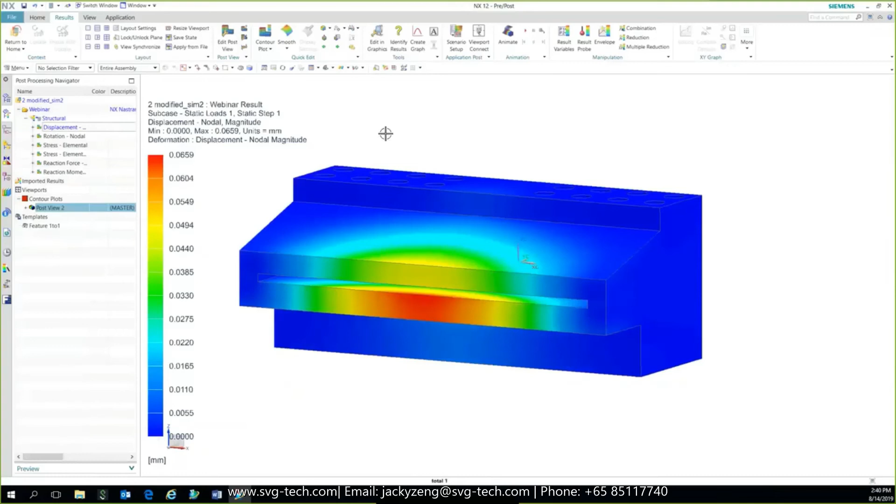We can also look at cutting planes through this model, although they're fairly constant. As you move the plane around, you can dynamically update it as you slice through and verify the different areas of what the displacements may be.

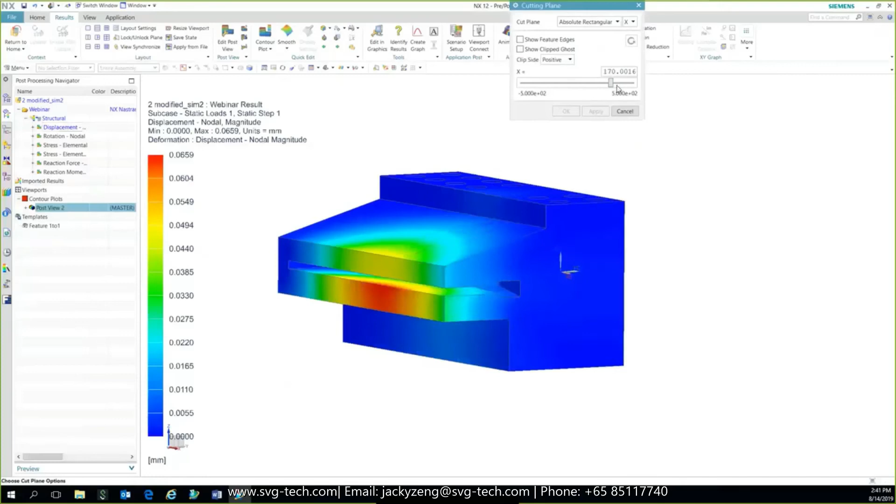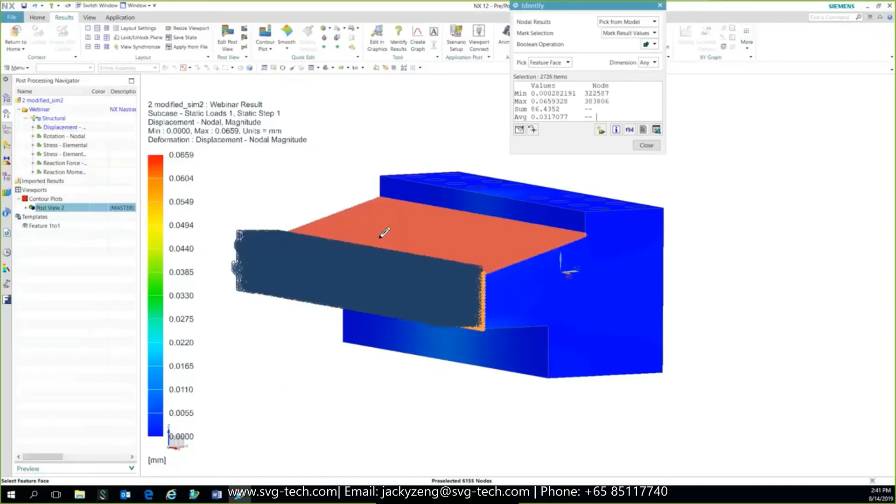Something else you'd probably want to do with this model is find out what all the displacements are on a given face. So we set the picker to be a face, pick a face, and it will list all the different values. There's a lot of them with the mesh size I have, but the good thing is it tells me the min and max, which we knew was 0.0659.

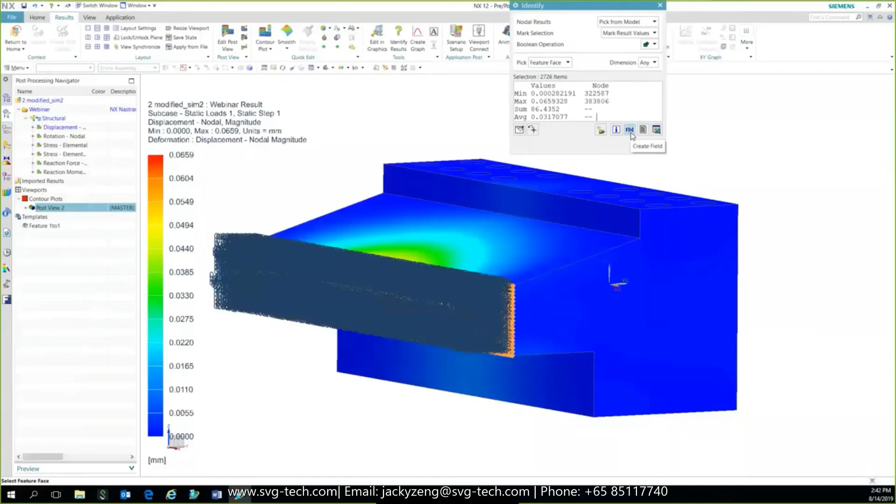The average is 0.031. We can also export this into Excel if I wanted to view it there for whatever reason, or export it to a text file. I can save that selection as a group as well, or create a field from it to use in some other area of analysis.

So I think that's pretty much it. I'll turn it back over to Pat at this point to summarize what we've talked about today.

Pat? Yeah, thanks, Tim. Good job. Let me get my screen back here. All right, thanks again, Tim, for that—that was a really great demonstration.

As you just saw in Tim's demo, both the flow and structural simulations were embedded within the CAD environment, making it easier for a design engineer to learn and navigate the workflow. This also allows the flow and structural models to be associated to the base NX CAD model, so any design changes can rapidly be reevaluated with minimal rework. Finally, you can easily chain analyses together so results from one analysis can be applied as input to another, such as the pressures from the CFD result being applied to the structural model of the die to check the deformations of the exit opening.

Just to go over a couple of customer examples here—let me get my slide change, there it goes. Guangxi Yuchai Machinery, the largest producer of internal combustion engines in China, uses simulation-driven design to help meet market demands for more personalized products.

Greater personalization means more product categories, but with limited dedicated CAE resources, it became impossible to promptly feed CAE analysis results back to design engineers. By implementing simulation-driven design methods within the designers' NX CAD environments, Guangxi Yuchai Machinery's designers could begin using simulation to get immediate feedback on how their designs will perform.

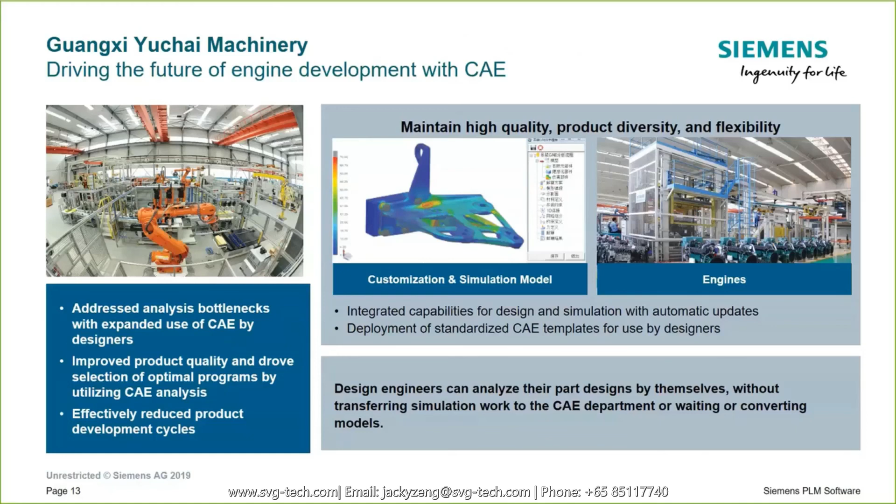Mitsubishi Materials Corporation used simulation-driven design to study various design variants to optimize the liquid cooling channel opening to improve cooling performance for advanced cutting tools. Even though Mitsubishi Materials doesn't have specialist CFD analysts, their designers were able to perform basic CFD analysis within their CAD environment and ultimately achieve an 11% increase in flow rate through their cooling system.

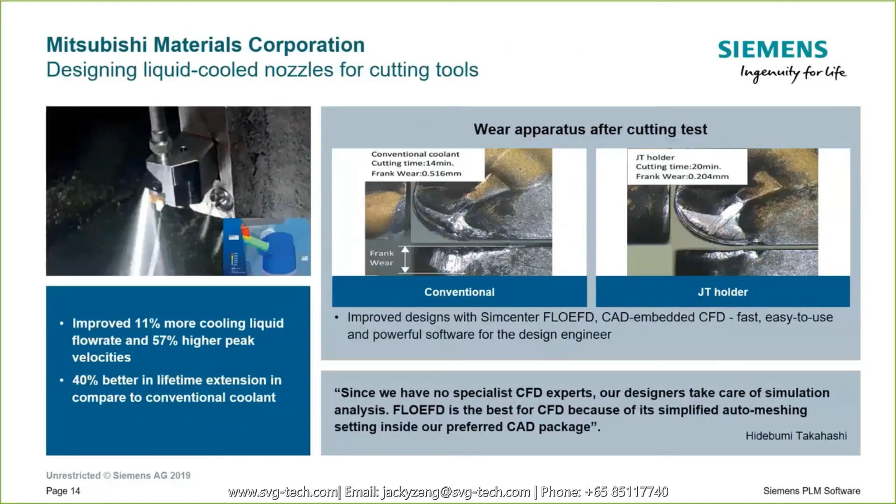So in summary, out-of-the-box NX CAD embedded simulation helps you quickly assess the performance of your design for structural integrity, kinematic and dynamic motion, and fluid dynamics and heat transfer. The simulation all takes place in the same NX CAD environment, so you don't need to learn a completely new user interface or deal with messy data transfers. Finally, the simulation is based on trusted Simcenter technology, so your analyses can scale to high-end simulation experts for further analyses.